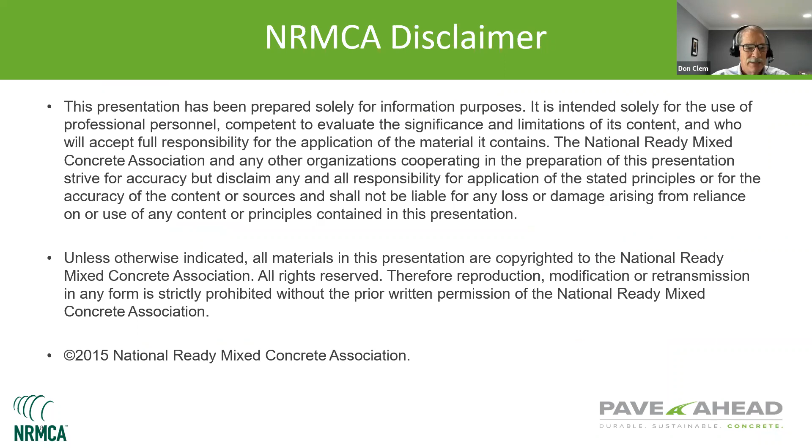And we work under the direction of Brian Killingsworth, who's a very good paving engineer. He has a master's of paving from Texas A&M and is a wealth of information. He's our team leader. This is our disclaimer statement that we put up in every presentation that we provide. Basically, it says we at NRMCA strive to present information as accurately as possible. We intend for you to use the information at your own discretion, and we do disclaim responsibility for how the information is actually applied.

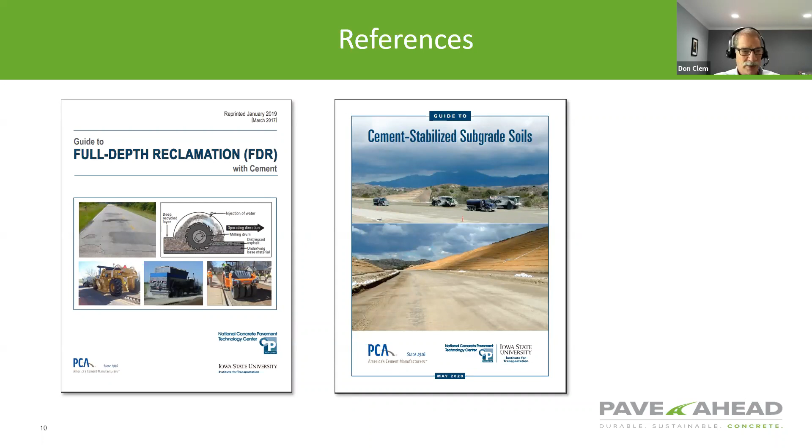Our references include the Guide to Full Depth Reclamation, fondly known as FDR, with cement, and also Cement Stabilized Subgrade Soils. Both of these publications are produced by the National Concrete Pavement Technology Center. They do a very good job producing publications - they're easy to read, very well organized. You can find those online at our paveahead.com site, or on the National Concrete Pavement Technology Center site to download these publications.

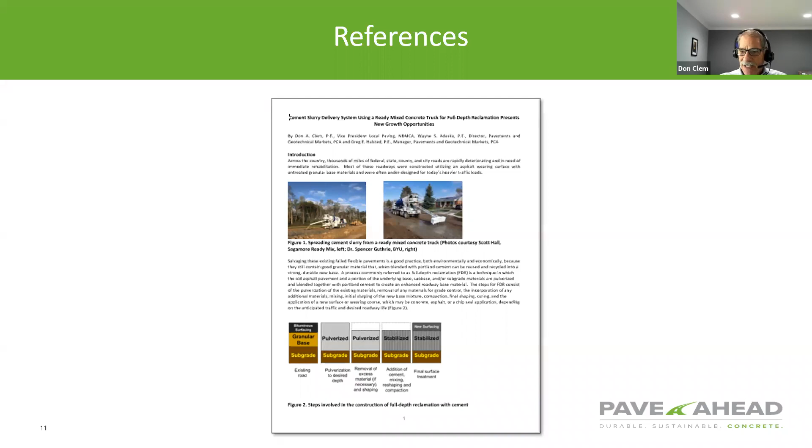We also used as a reference an article we put together last year, written by Wayne Adaska, a former PCA employee, Greg Halsted, a current PCA employee, and myself. We wrote this article last fall for the Illinois Ready Mix Concrete Association. It was published in their newsletter, and I'm sure Theron can get that to anybody who would like that resource. I should mention Greg Halsted with the Portland Cement Association - he's based in Bellingham, Washington, and he is a very good resource for anything regarding geotechnical applications of cement and soils, be it soil cement, full depth recycling, or cellular concrete. He's an expert in all of those areas.

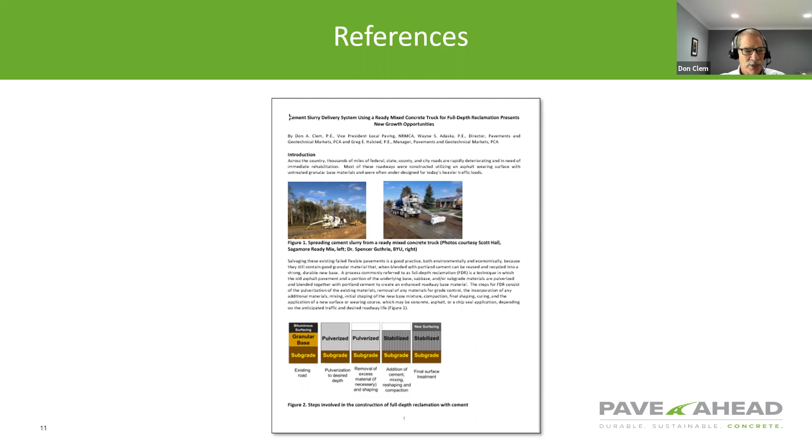So our first topic today is understanding the definitions of soil cement and full depth reclamation. And for that, I'm going to turn control of the webinar over to Jonathan.

Yeah, if I could talk here, I get a little tongue twisted. I want to thank you for the introduction. I do have my camera off - I'm nothing to look at, I can tell you that. I've also got bad lighting and I'm on a laptop, so it's not the best backdrop. Hopefully everybody can hear me good. Again, Jonathan Pease with Rock Solid Stabilization, and also the current president of ARRA.

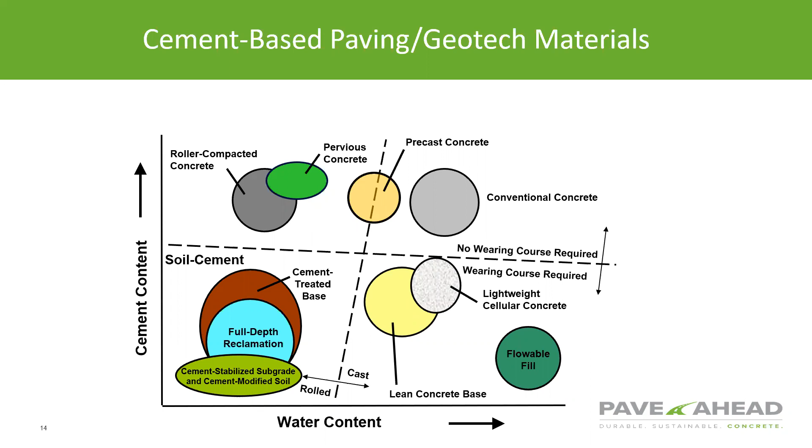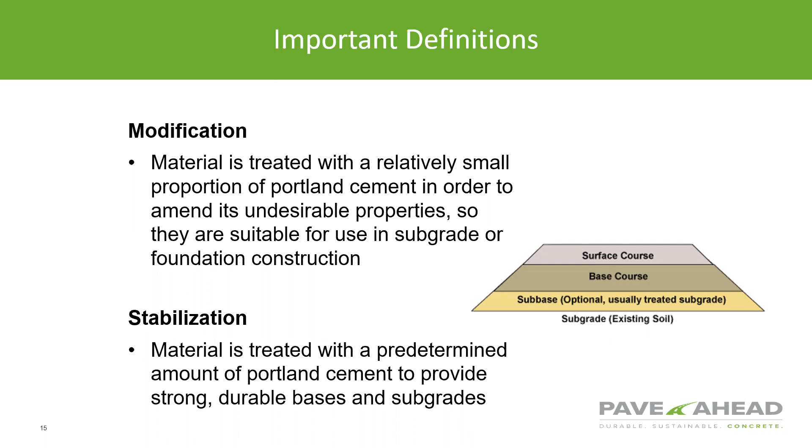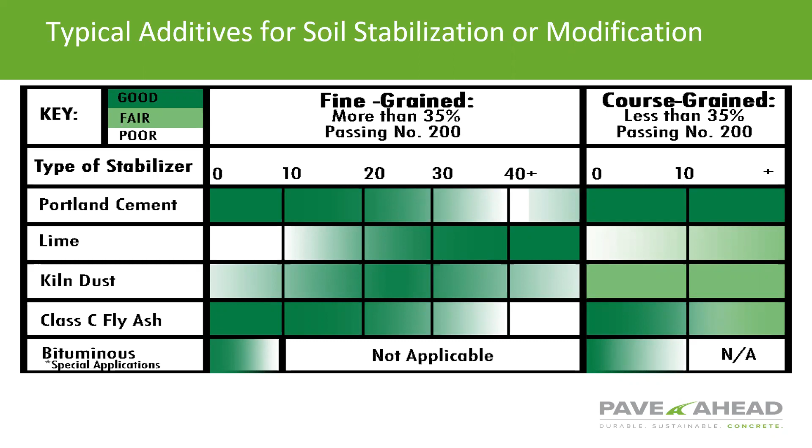It shows you the different soils they work in, fine grained, coarse grained, and where they typically work best. So you've got your Portland cement, and your Class C fly ash, which is becoming harder and harder to get your hands on. Very similar characteristics versus your lime and your kiln dust, and then there are also some bituminous ones you can use in certain soil conditions. Just a nice chart for reference in the future.

So soil cement definitions: soil cement refers to a compacted engineered mix of soil, cement, and water, designed and constructed for various pavement and geotechnical applications and characteristics. The term soil cement is an umbrella term covering four types of cement treated projects, like CMS, cement modified soil, and CSS, cement stabilized subgrade. There's all these different acronyms used throughout. FDR is a big one, CTB is another big one.

If you're treating aggregates, a lot of times your aggregates don't have the best characteristics, so you can treat aggregates. They do a lot of that up in North Dakota, where they've got really sandy, non-angular gravel, and they improve the gravel characteristics with cement to make it a better quality gravel.

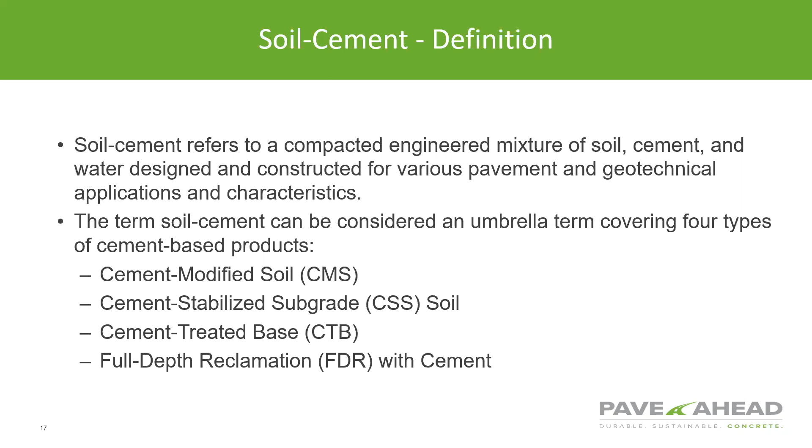Obviously using cement with FDR, and we'll talk about some other additives in that realm later. FDR definition: it's a method of flexible pavement reconstruction, so this is just HMA, not concrete, of the existing asphalt base and/or subgrade. You're removing the existing entire asphalt cross section, usually into the existing aggregate base and/or into the subgrade at times, making a nice homogeneous blend of it all and mixing it together to make your new sub-base material, usually to some design strength or performance requirement. It's removing all the imperfections in that cross section and making a better overall platform to build the actual pavement cross section on top of thereafter.

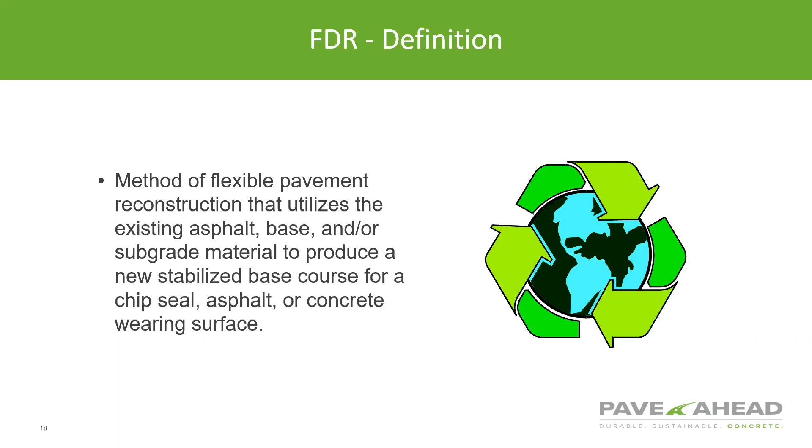There are three main types of FDR stabilization. The first one is mechanical, which a lot of states are doing right now. A lot of this is happening in Michigan, where they just don't have the budget to repave roads, so they're taking old paved roads and turning them back into gravel roads. That's basically mechanical stabilization, where you're just taking that existing asphalt and pulverizing it down to about 1.5 inches minus.

Then there's bituminous stabilization with asphalts, emulsions, or foamed asphalt. And then there's also chemical stabilization, which is usually some type of self-cementing material. The biggest product used for FDR by far is Portland cement. It's readily available everywhere, it's consistent, it has ASTM and different types of specs that everybody has to make it to. It's very consistent and used worldwide.

There are also some other polymers and enzymes. In the event your existing cross section doesn't have the right gradation needed in any of these processes, you can do what the industry generally calls add rock. You could add fines or coarse aggregates to change the matrix of your blend after you actually run it through the reclaimer. So that's the term add rock, but it could be fines too, it doesn't have to be just rock. It's just to get a better matrix overall.

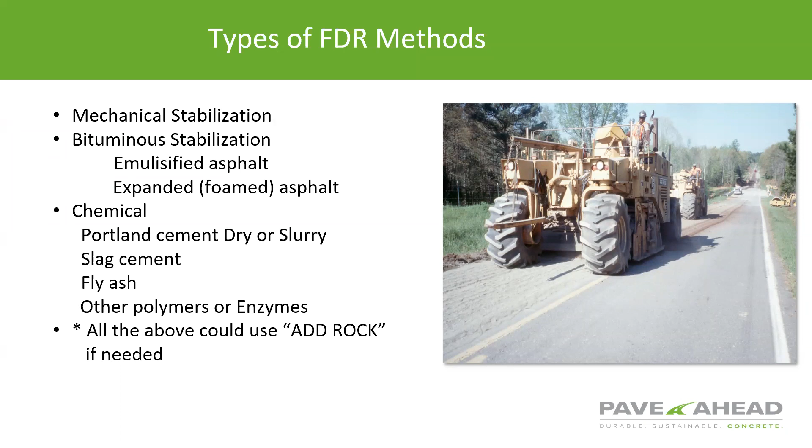So here's the different layers where you can see cement being used. Obviously you've got your untreated subgrade at some point in time, you're not going to go down indefinitely. Then you could have your treated subgrade with cement, you could put cement in your base courses, you can put cement in your FDRs, it could be in your finished surface layers. It could be used throughout the entire cross section of a road, so it's a very versatile product for sure.

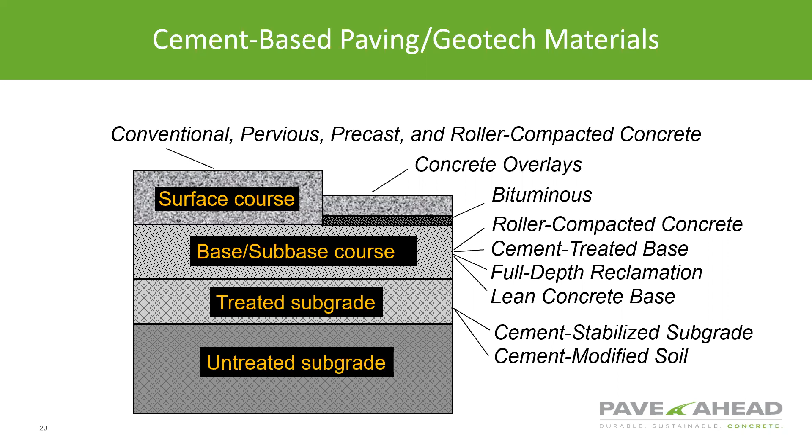So in the soil cement family, I think we kind of covered this already, but we've got cement modified soil again, we've got cement stabilized subgrade, cement treated base, and FDR.

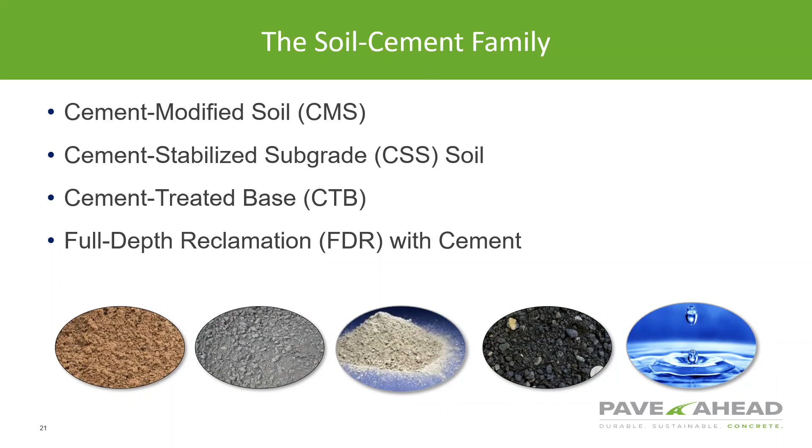So there's the different acronyms there, which are obviously used frequently in the industry, and we're just trying to create common terms so that when we're talking about them, everybody's talking about the same thing. But that's pretty difficult to achieve commonality because even machines have 15 different names for the same machine out there.

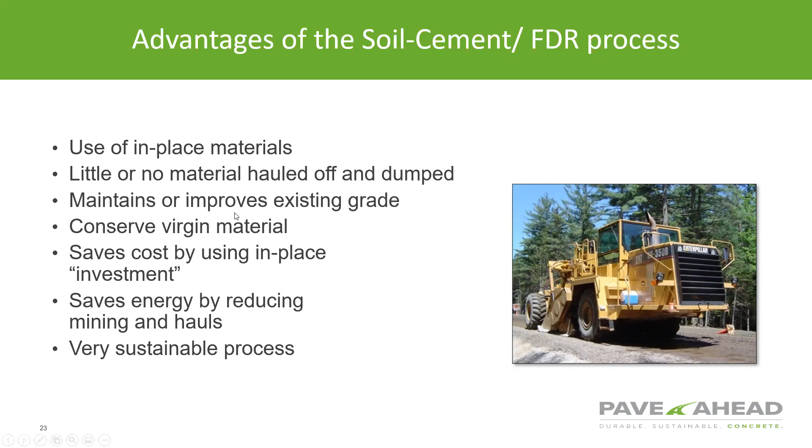And the bottom line is, as Jonathan mentioned, it saves you money by using that in-place material, because you're recycling and reclaiming those in-place materials to create a new solid base for either an asphalt or concrete pavement, or perhaps a chip seal pavement. You're going to save a heck of a lot of money over removal and replacement, so the taxpayers really win with this process.

This is an ARRA slide that Jonathan provided to us, and you can see there are a lot of benefits that FDR has over the overlay process, and quite a few over remove and replace. Probably the biggest one is that lower cost.

But the sustainability aspect is going to become more and more important. As I mentioned earlier, I cover the Northwest — not California, but Oregon and Washington — and I'm watching legislation out there every year that more and more covers construction materials. So sustainability, whether we like it or not, is going to become a bigger and bigger part of material selection on projects in the future.

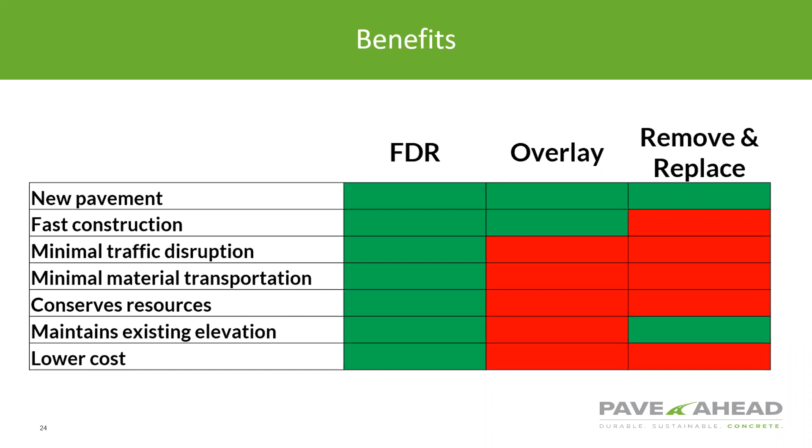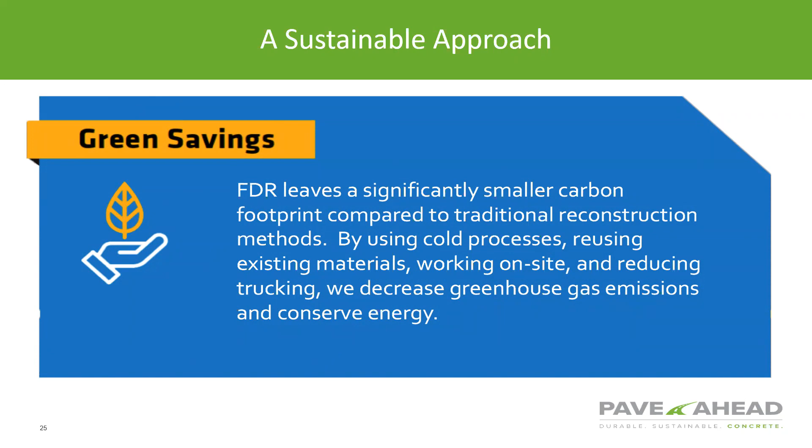And in this case, it actually makes a lot of sense because it saves you money as well. FDR leaves a significantly smaller carbon footprint compared to traditional reconstruction methods, by using these cold processes, reusing the existing materials, working right on site, with generally no hauling off of materials. We decrease the greenhouse gas emissions and conserve energy associated with that project.

This is probably, beside the cost aspect, the biggest benefit I see to the overall FDR process — the performance of these subbases, particularly underneath flexible pavements. As most of you on this call know, with a flexible pavement you have a layered system, and the layers beneath that flexible asphalt really have a lot to do with the load carrying capacity of that roadway.

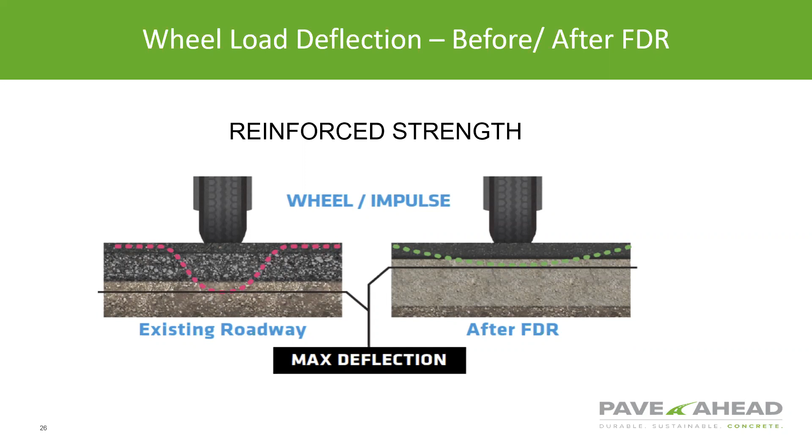So there's a lot of advantages for using Portland cement as a stabilizer. Jonathan mentioned that there are quite a few different stabilizers out there.

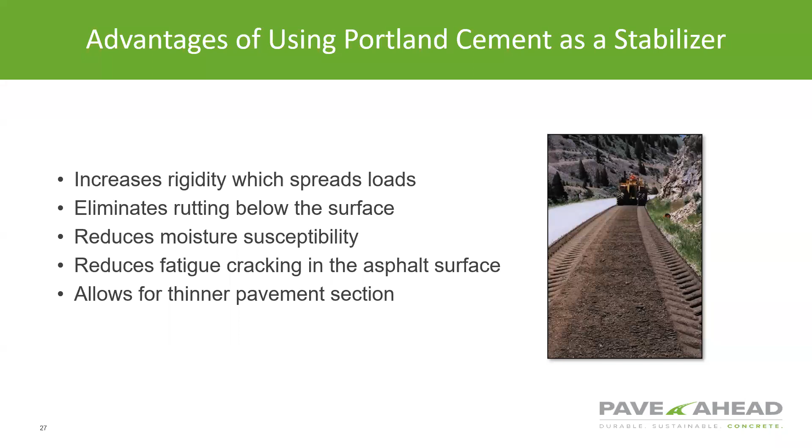Portland cement is known in the industry as the universal stabilizer because it works with so many different soil classifications. The benefits include spreading the load, which eliminates rutting below the surface. It reduces moisture susceptibility, reduces fatigue cracking in the asphalt surface, and could allow for a thinner pavement section. What I recommend to engineers is they don't reduce the asphalt pavement section, but rather leave it as is and enjoy a longer pavement life. That will certainly increase your life cycle cost benefit, or reduce the life cycle cost on a project.

Within the cement family, we've got a choice of using either a dry spreading method or a slurry method. There are some advantages to the cement slurry application method, and probably the biggest is that it reduces the dusting associated with the dry spreading method. This would come into play in an urban setting, or perhaps next to a hospital or other facility where you really don't want any dusting. That would be an ideal place to use a slurry method.

Also in, let's say, a cul-de-sac or very tight quarters, the ready mix truck can bring that slurry into those very tight places with ease. There is a variety of equipment available for delivering slurry using a ready mix truck, and there's also tanker trucks that can deliver slurries. Laboratory testing has demonstrated that there really isn't much difference at all between the slurry process and the dry spreading process as far as unconfined compressive strength. So as far as performance between the slurry method and the dry method, there's really no measurable difference between the two.

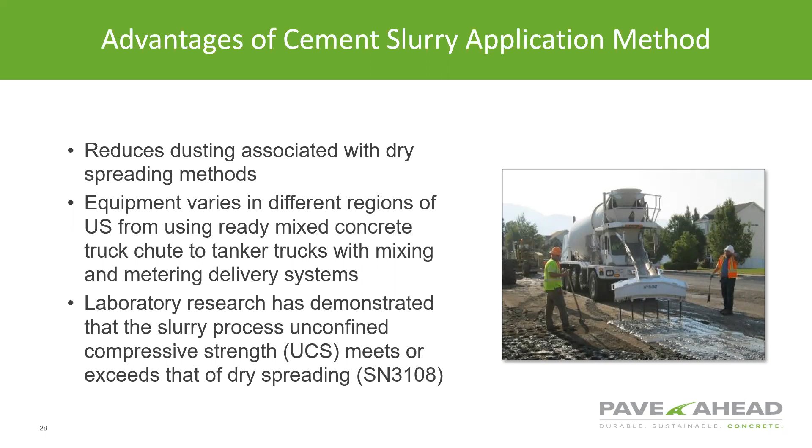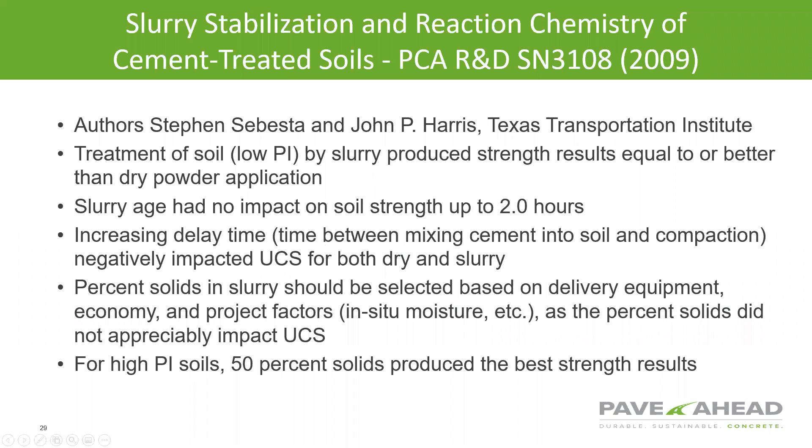Here you can see results of a study, an older study done in 2009 by the Texas Transportation Institute. Some of the findings: as I mentioned, there's no difference in the strength results. Slurry age had no impact on soil strength up to a period of two hours. Increasing the delay time did negatively impact the unconfined compressive strength for both dry and slurry. The percentage of solids in the slurry should be selected based on the delivery equipment. For high PI soils, 50% solids produced the best strength results in this particular study.

Illinois Department of Transportation recently adopted a special provision. We worked with Illinois DOT, along with Portland Cement Association and the Illinois Ready Mix Concrete Association, on preparing this specification. It was very well vetted, a consensus specification. I'd like to recognize Theron Tobolski with IRMCA and James Krstulovich with Illinois DOT for their work. They put in a lot of time, and it's a very good document that resulted from it.

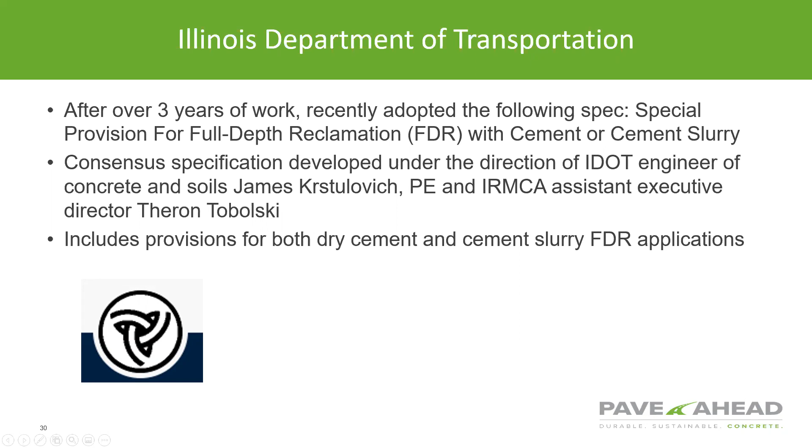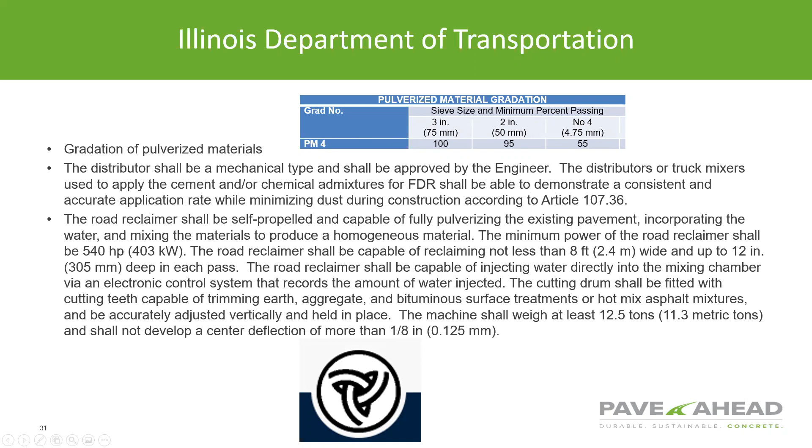I'm not going to go into detail, but what you can find here is a gradation for the pulverized material, specification on the reclaimer itself, process specification on the slurry process with some limits—a minimum 60% dry solids content by weight is in the specification—and a time frame of 90 minutes after first contact for the material to be applied to the surface. It's a very comprehensive specification if you'd like to go online and look at that.

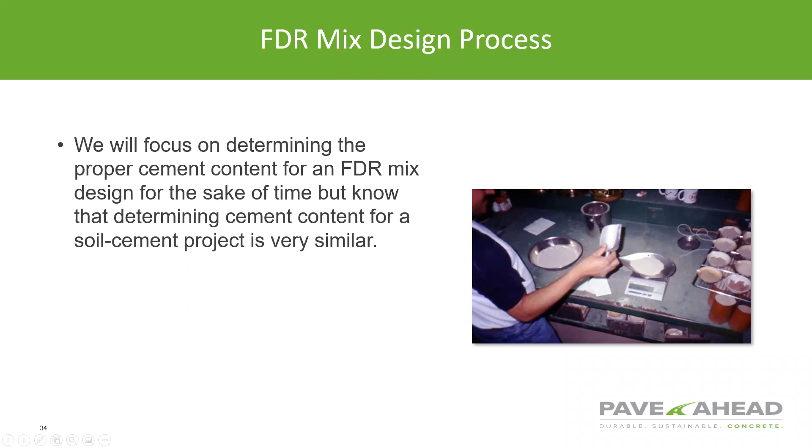Next topic I'd like to cover is how to determine the appropriate cement content. We're going to focus on FDR for the sake of time, but the same provisions apply for soil cement and the other family of cement products you saw earlier. The basic process is you conduct a field evaluation to determine the materials that make up the existing pavement. We want to take those materials from the field, bring them back to the lab, and combine them in the same proportion you find them in the field.

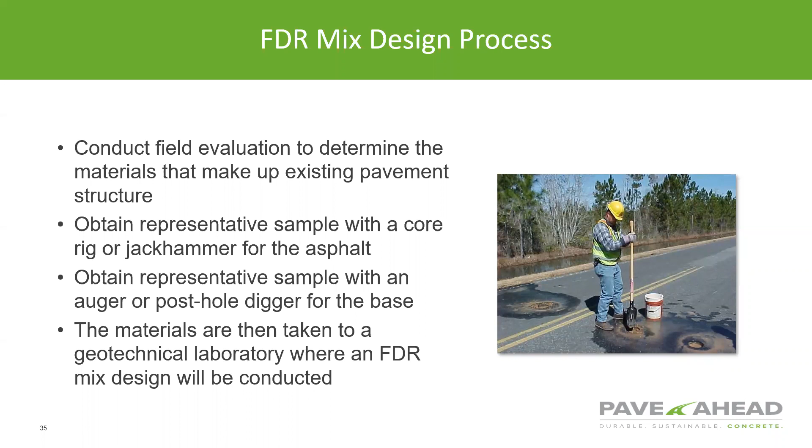You can obtain a representative sample with a core rig or jackhammer for the asphalt, and an auger or post hole digger for the base below. Materials are taken back to the lab and recombined. It's crucial to obtain a good sample of all those materials and combine them in the same proportion found in the field. You want to take enough cores to ensure a representative sample for the whole project along its length. In the lab, they'll run sieve analysis, compaction requirements, maximum dry density, and optimum moisture content. Finally, they'll analyze all of that, and the lab will determine the target cement content that provides the specified unconfined compressive strength for the project.

Typically, we will see those unconfined compressive strengths in the range of 300 to 400 PSI. One point I want to make is that more cement is not necessarily better, so keep that in mind. We're looking for a balanced design.

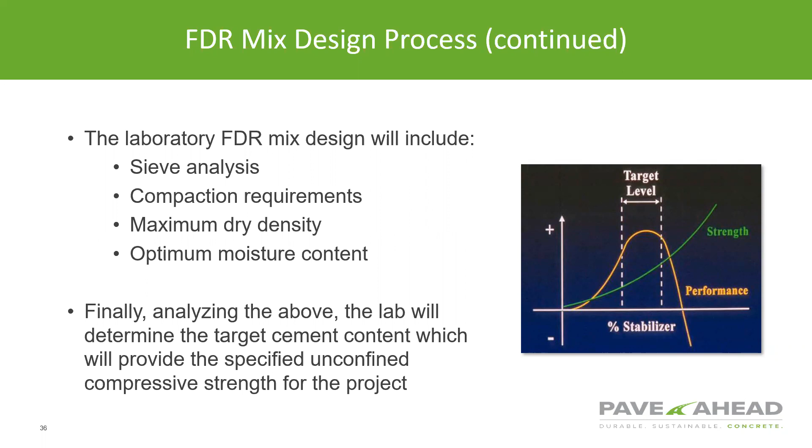So we really want a balanced design. We want to be in this area where we have the best performance of our subgrade material and surface course - I guess I would say the best performance of the system itself. At the end of the day, that's what is most important.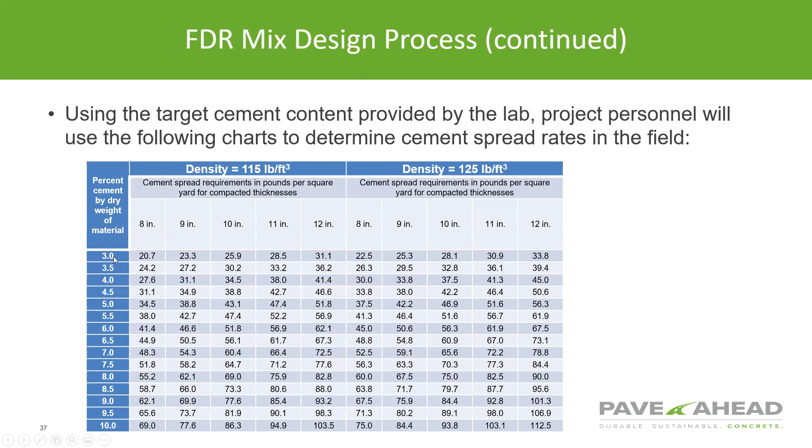When they do reclamation, generally speaking the highway department on state highways doesn't take any of the subgrade materials below the asphalt and the base. So they stay in the granular materials and just use a flat 2% to stabilize those materials, and they found that works very well. But in the normal situation, you're generally going into the subgrade material, so you're probably going to be in this range here. We'll look at this in more detail a little bit later.

I'd like to mention that Jonathan's company has put together a very nice tool which allows you to skip that chart altogether. It's actually an app where you put in the dry density, depth, and the application rate.

What you can end up with is the spread rate, the coverage area, and for a given width - let's say 16 foot in this particular instance - we know we want to go 134 feet to cover that area with the cement that we're spreading. We'll look at those calculations in more detail. But to download this, just Google rock solid stabilization and reclamation, and this particular tool will come up.

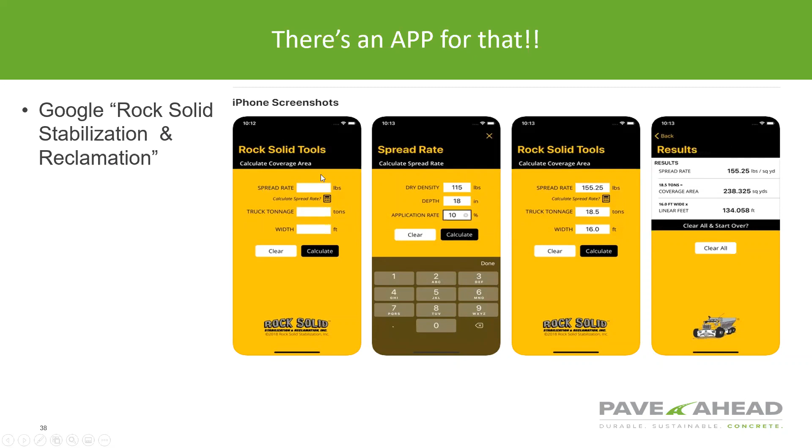I checked it out, it's really put together well. And with that, I'm going to turn control back over to Jonathan to talk about the soil cement FDR construction process. Jonathan, all yours. Thank you.

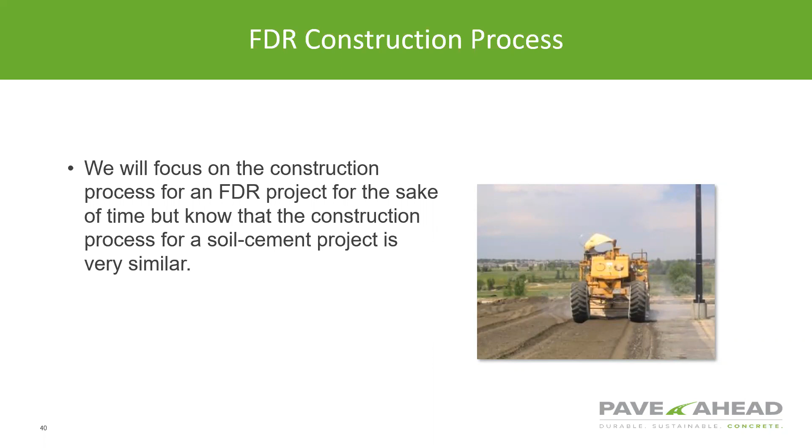The FDR process: you've got your existing road to the left there with the existing asphalt, gravel, subgrade. Then you typically go through and do a pre-pulverization, and you blend in that—so if you're going to do a 12-inch FDR, you want to do a 12-inch pre-pulverization typically.

The only time we haven't done that was a job for FHWA where it was 7 inches. We did a 7-inch mix design and the cement content came back extremely high. So when you start seeing materials being used at higher rates than they should be, there's probably something goofy going on, or it's not the best material to use—which I'll bounce back to in a second.

When we were talking about the different things out there with cement, limes, and so on, we've done quite a few projects now where we had to use lime first to chemically modify the soil, but then had to use cement to actually stabilize the soil and give it long-term strength. So blends are a thing out there.

They work fantastic. We're actually challenging people in Shreveport, Louisiana with this—they're just used to the way they do things down there with lime. We're introducing lime-cement blends and they're kind of like, what are you guys doing? And we're proving it in the field, proving it with mix designs, and now the entire project is going that way. So there are a lot of things that are regional that people just do because that's what they've always done. But there are better ways to do that stuff.

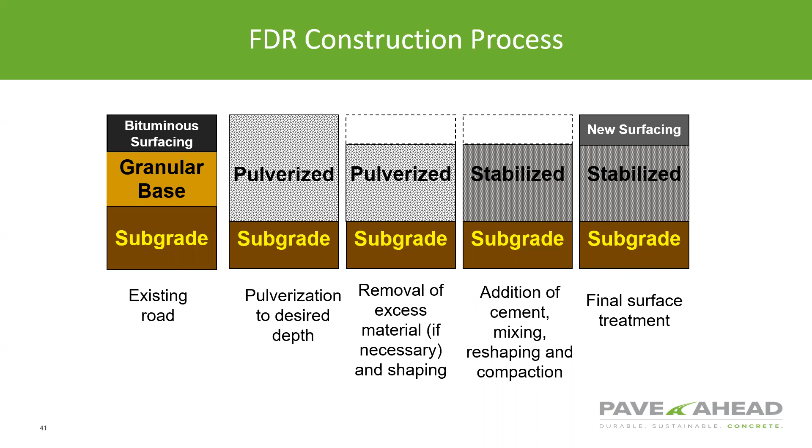Just by doing a pre-pulverization at a different depth than the actual process depth, we had fantastic results—and that was on an FHWA project. Then you stabilize with cement, reshape, compact, get it all graded and done to the right cross-section profile, then put your new surface on there. That's just a high-level overview of what happens.

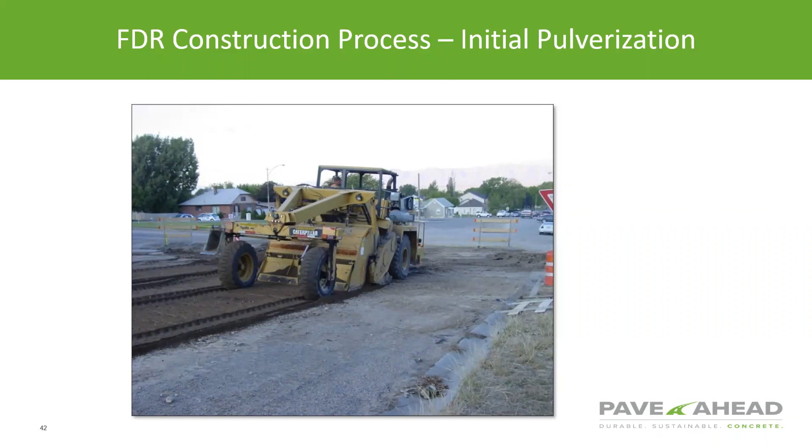Here's some pictures—you've got your initial pulverization. We do have some older pictures in here because we want you to see that this stuff isn't new; it's been around and done for years. That's an old reclaimer right there—you'd be hard pressed to see one like that working anymore today.

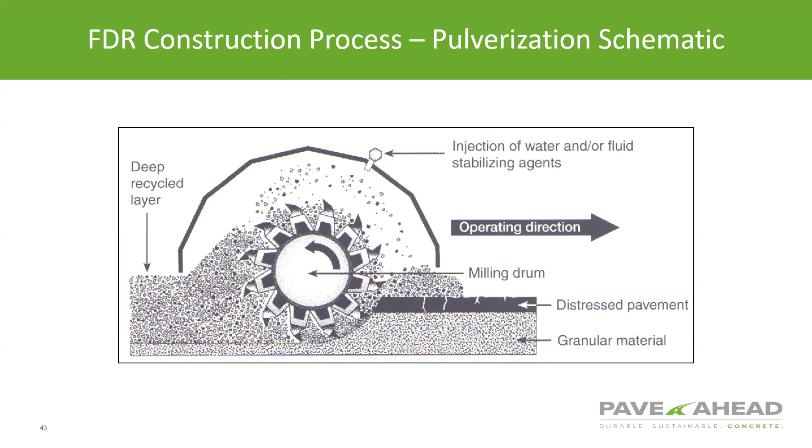So that's what you would be seeing if you're looking inside that drum, but it would be pretty harmful to do that while it's moving, so we have to do it with pictures.

After you pre-pulverize, you want to shape it to the grades of your final surface that you're going for, so you have a uniform cut on the mixing part. Before you spread the material for the stabilizer, you want to make sure your cross section is what you want it to look like in the end, so you're not cutting and filling your stabilized material. So pre-shaping and pre-compacting is very important to do.

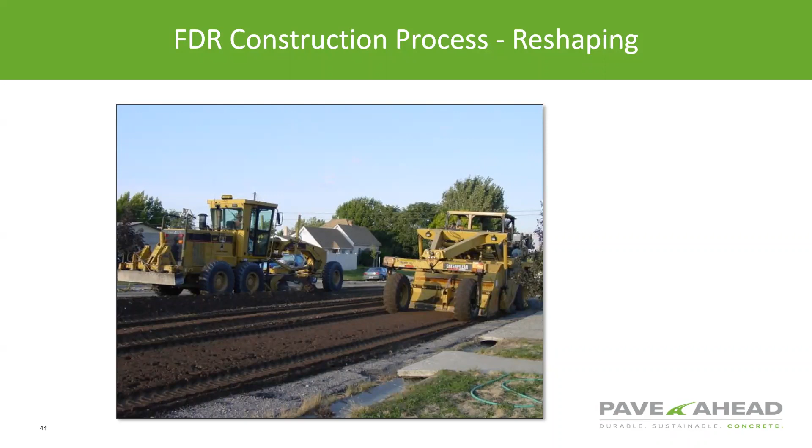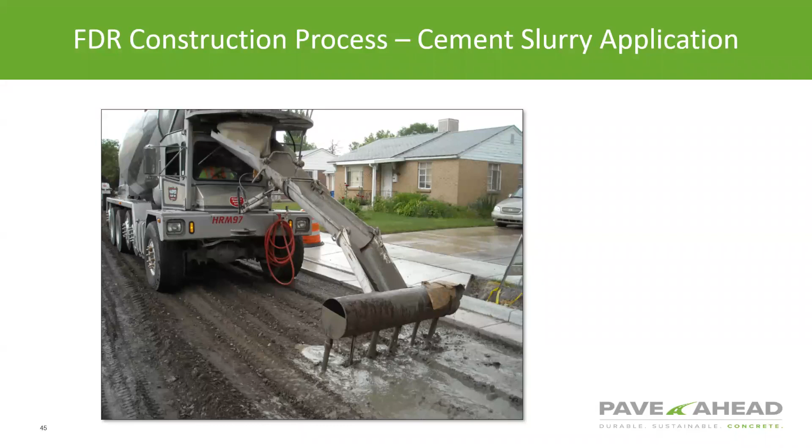Then you want to apply your slurry. There's obviously various methods, and we're going to talk about that a little bit later on, but this is just one of the methods of spreading slurry.

Every load gets laid out, hence that's why we use that app. So if we're doing a road that's 22 feet wide and a load comes in at 26.98 ton, and we know we're supposed to put down 52 pounds a square yard, it can tell our operator exactly how far to go with that load. We lay it out and make sure that load fits into that box, but there's aspects of humidity, temperature, things like that affect how the materials will flow out of the box, out of the machine onto the ground.

So it's not like you can just make one simple pass and it's perfect every time. You have to trust some old school technologies, still put it where it belongs, and visually look at it.

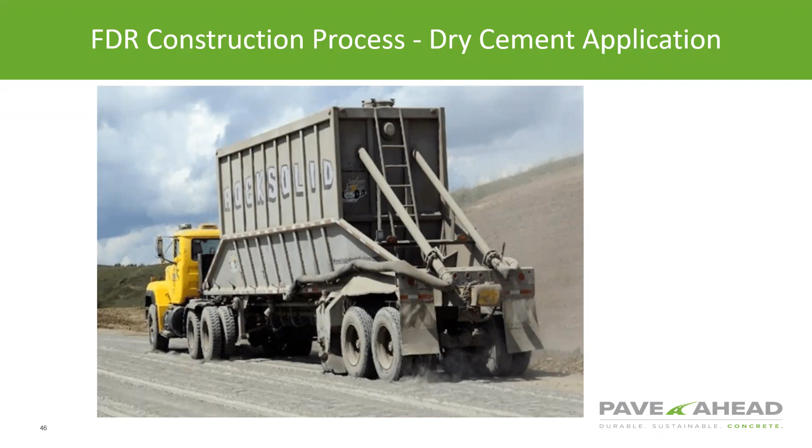There's a bunch of manufacturers of this equipment. A lot of people have some proprietary stuff that they do, but there are parts of the country, mostly down south, where you will find people bringing a pneumatic tanker out and having somebody walk alongside the truck and get underneath it almost, opening and closing valves and literally blowing the material on the ground, with zero control over what and how much goes on the ground. If that happens, or if you don't have specs that don't allow that, you should have something that does not allow that, because it's such crude methods that it shouldn't even be allowed anywhere in the world, in my opinion. So this is just an example of a dry spreader.

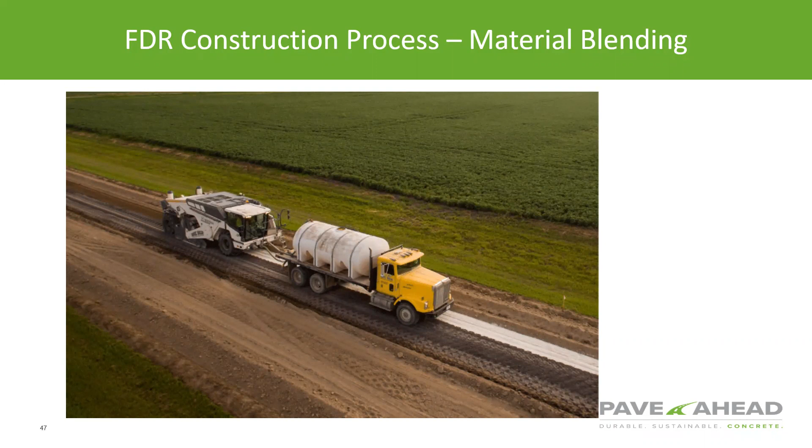Then you've got the blending of the materials. Once your stabilizer's on the ground, whether it's in a slurry or a powder form, you've got to blend it with the reclaimer. Typically you need to be adding moisture, not always, but if you need to add moisture, you're going to usually be pushing a water truck in front of the reclaimer. That way you get exactly the moisture content you want, because it is a water cement ratio. It is a recipe, and you've got to follow the recipe in the field. That's exactly what you can do with the right equipment.

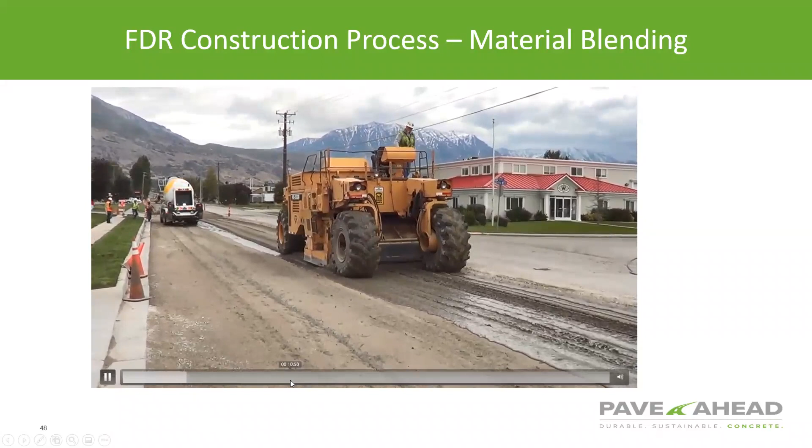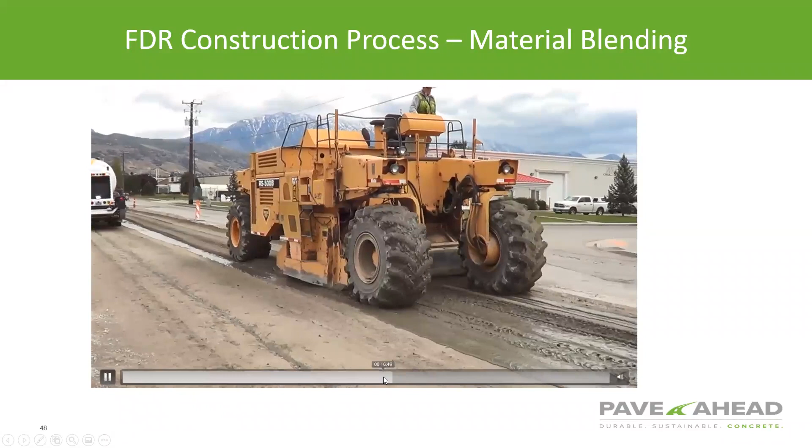Here's a little video on some blending of slurry. You don't see a water truck here, but if there's enough existing moisture in the ground, along with the additional moisture from the slurry, you might not need to add water. As you can see, in this particular case, it likely was not necessary. It's a pretty smooth operation. You could see, even right behind the reclaimer, if one of those cars driving by had to get into that driveway right next door, they could cross pretty much right over it.

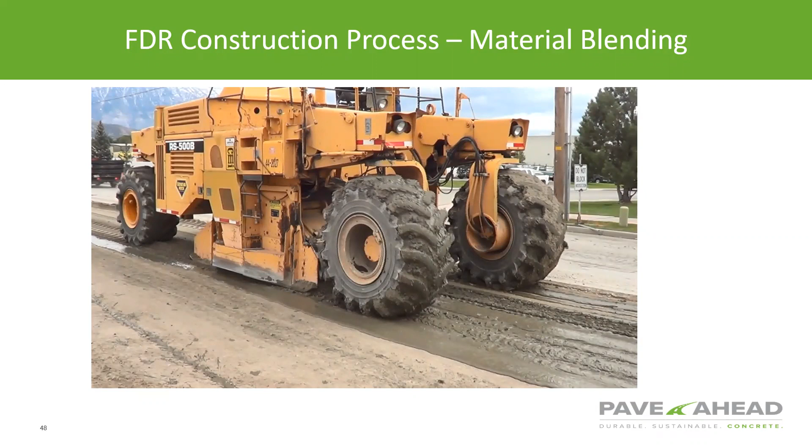And if not right then, they could do it after the first one or two passes with the compactor. So your disruption to the public and getting access in and out of driveways or parking lots, adjacent roads, is pretty minimal with FDR. If that was a full depth removal and replace, and you got an 18-inch drop off, I don't care if you got a Humvee, you're not driving through there until somebody puts in some temp aggregate to drive through, or ramps it and things of that nature.

So, very, very friendly for the environment of the public, and very conducive to that. Here's just another shot of some slurry being mixed in. This is actually up in Montana, getting mixed in with some slurry on the ground.

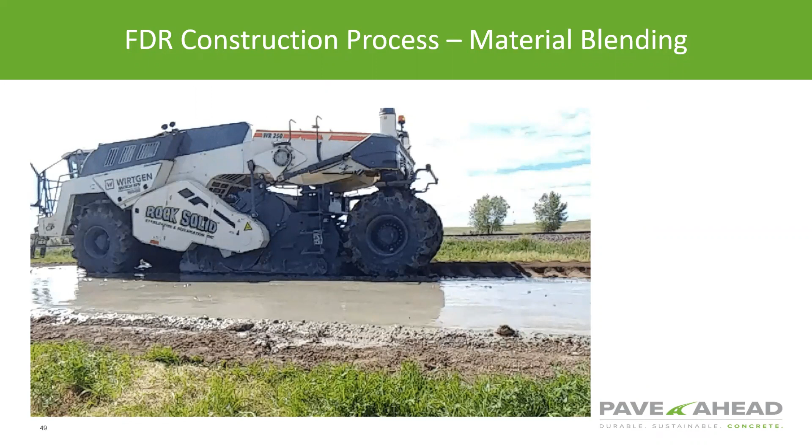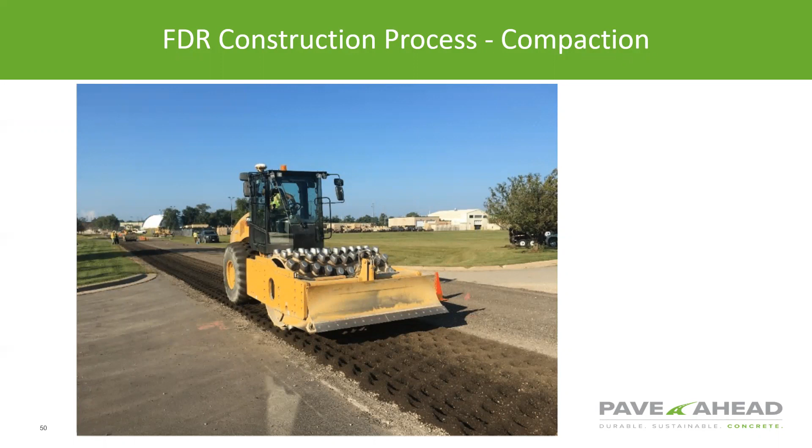And then you have your grading. Obviously, you want everything graded back to its proposed elevations, cross slopes, and the grading process.

So from the time the powder or material gets blended into the ground, if you're working with a slurry, you can't let it sit on the ground for 3 hours. A powder, you can let it sit for 3 hours if it's not soaking up moisture. But from once you get the mixing started and done, to the final grading and rolling, in my opinion it should be closer to that 2 hour mark. Some specs are like 4 hours, but the tighter you can keep that timeframe, the better. If you can get it done in a half hour, you're going to have a better product than if it takes an hour and a half. And an hour and a half should be better than if you get it done in 3 hours.

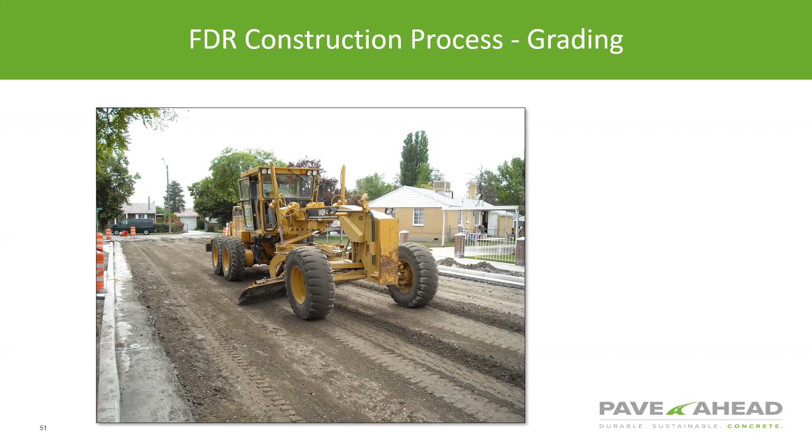So the tighter you can keep that time frame, the better the product is going to be in the end. Not getting strung out too far, keeping everything together, with a competent team that can handle it, will always give the best job possible.

And then you got some type of finish rolling on the back end. It could be steel drum, could be pneumatic rollers like this, sometimes a combination of both. It really just depends on local markets, availability, things of that nature, but they all work in their own ways and they all have their pros and cons.

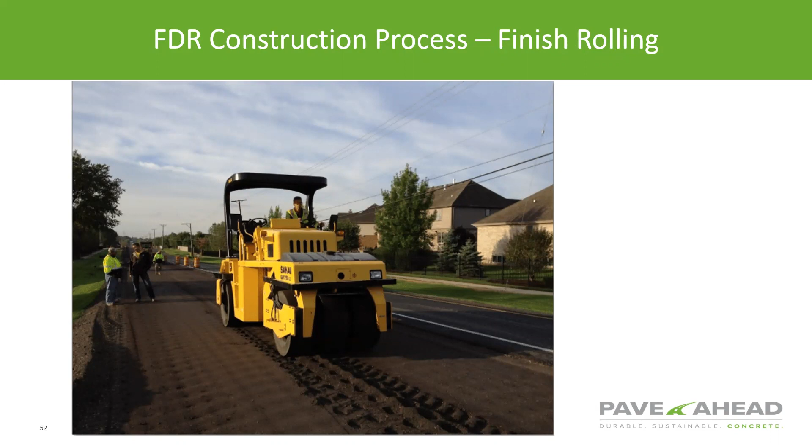And then some type of curing, typically it could be wet cured with water, or you could emulsify cure with emulsion. It's about trapping that moisture in, kind of like your bridge deck. You pour concrete on a bridge deck - what's the best way to cure concrete? Flood it underwater for like a month. So if you can keep it damp, you're going to get a better cure out of it.

And it's this exact same thing with soils or FDR. If you can keep it damp, like - we've had some projects where we treated it and had some issues with frost coming in, so we put the gravel back on top. We actually wet it down when the gravel was sitting right there, just laterally moved it over, kept people off of it with loads, and let that gravel become the actual membrane that trapped the moisture in, which allowed it to help slow cure too. So it just depends on the cost you want to spend.

There are regions where it's very common to microcrack. Microcracking happens usually at least 48 to 72 hours, if not longer, after the curing process has happened. It's basically slightly rubblizing that FDR cross section to create little microcracks in there, and those won't reflect through, versus the other stuff, which can still crack. That's what I wanted to bring up a story about.

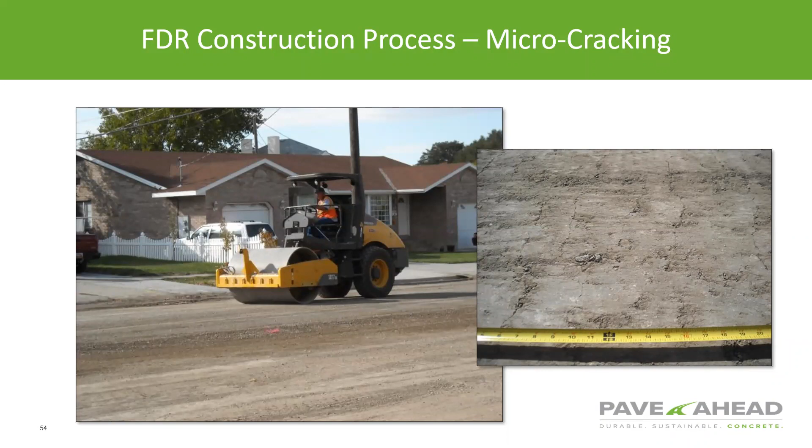So in a case like that, if it was microcracked, it might not have had as bad an effect with the reflective cracking coming through. So I wanted to share that story, I thought it'd be relevant for the audience.

So I think this one's still me, right Don? Yep. So like here, huh? Yeah, you got this slide, and then I take over after you.

I've seen cape seals, chip seals, microsurfacing. I've even seen fog seals temporarily go on as an overlay. That was another thing I wanted to bring up on the surface things.

There's a comment Don made about how you can thin up your surface. I agree, don't get the life out of the road, but you can also stage that budget. If you've got the budget, maybe don't do the surface layer this year, maybe wait 5 years and do it then because you've got plenty of strength below, and maybe do 2 layers of surface instead of just one. So if you're going to get say 5 inches of HMA, maybe do 3 inches this year, then 5 or 7 years later when you start to see a little distress in that asphalt, do another overlay with that same budget and stretch it out longer because you have that strength in the FDR down below.

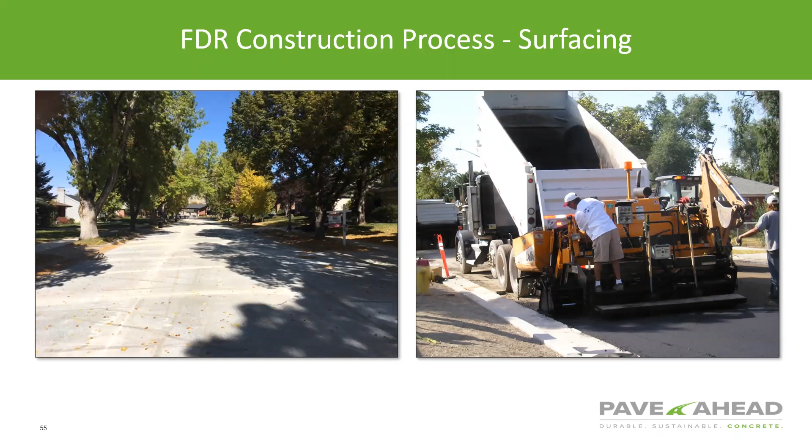So I think I overdid my talk here for you, Don.

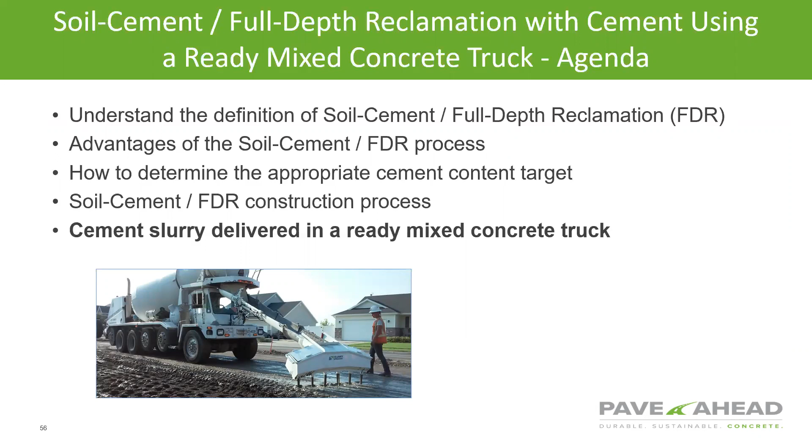Thanks, Jonathan. We'll move into the last segment, which is the cement slurry delivered in a ready mix truck. Some general comments about the slurries: of course they contain cement, water, and sometimes chemical admixtures such as a hydration stabilizer that extends the set time. Sometimes water reducers are used.

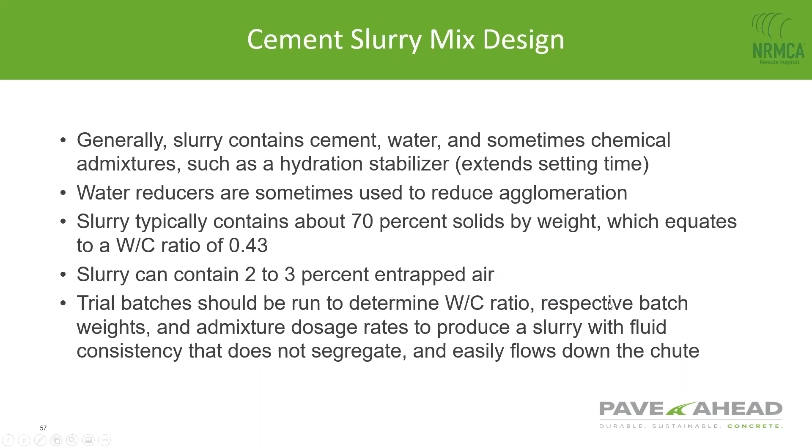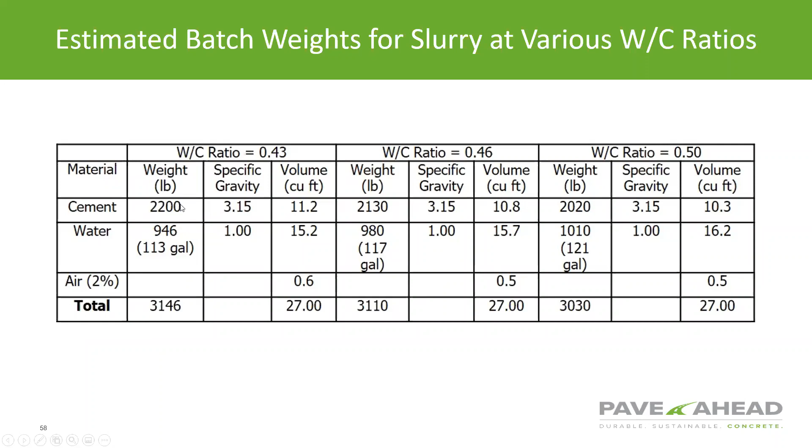Typically, slurries contain about 70% solids. Remember that the Illinois DOT spec requires 50. So the 70 equates to a water-cement ratio of about 0.43. Trial batches can be run to determine the best water-cement ratio with respect to the materials a given producer has. We put together these charts really for a ready mix producer to provide a starting point, and this would probably be your preferred mix design, everything else being equal, so that you can get the most cement material out to the job site in a ready mix truck.

As far as the slurries, once you get out on site, the application rate is based on the weight of the cement in the slurry, and the water is just in there to facilitate discharging. Sometimes sand and pea gravel may be added to facilitate mixing and placing, the flowability. So really, for a given set of materials, a producer should be able to develop one slurry mix design that works best for their materials.

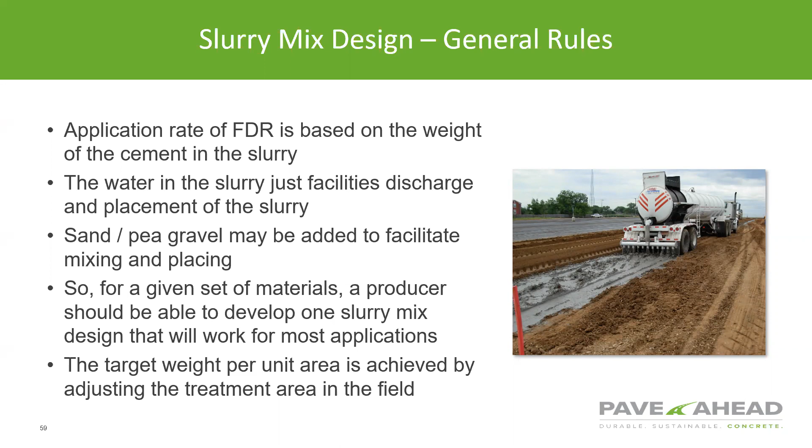What varies is that one slurry design will give you so much cubic feet or pounds of cement per cubic yard. Based on that, you just change the area it covers out in the field in order to work with different cement contents. We'll go through an example.

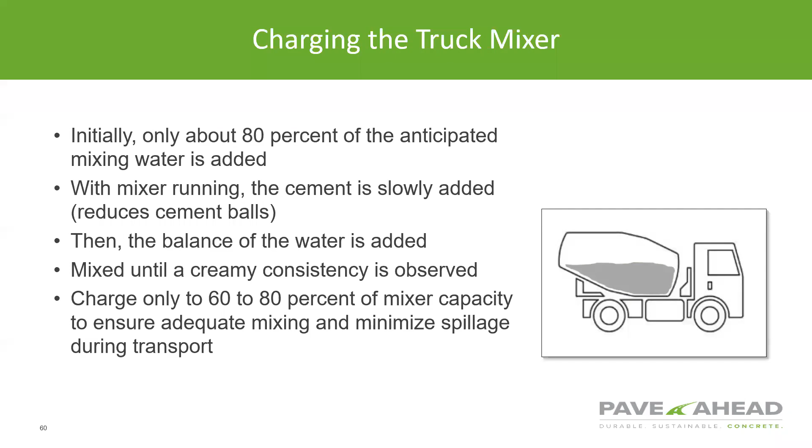As far as charging the mixer, initially about 80% of the water is added. With the mixer running, the cement is added slowly, then the balance of the water. Generally, you charge only 60 to 80% of the mixer capacity to ensure adequate mixing and minimize spillage during transport. So you can't utilize the capacities that you would with normal concrete.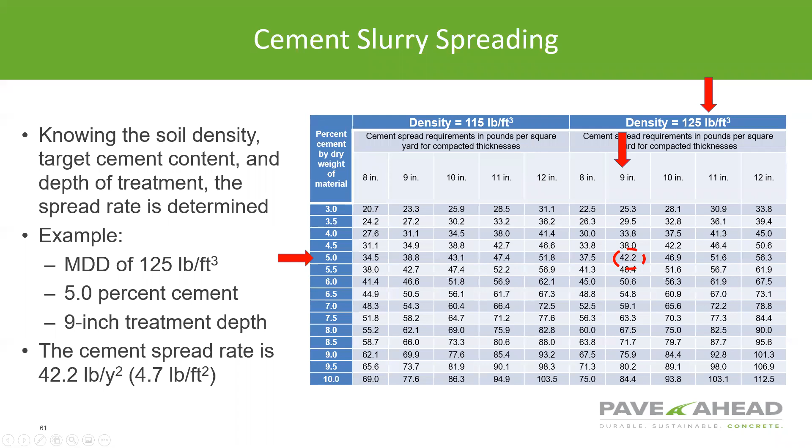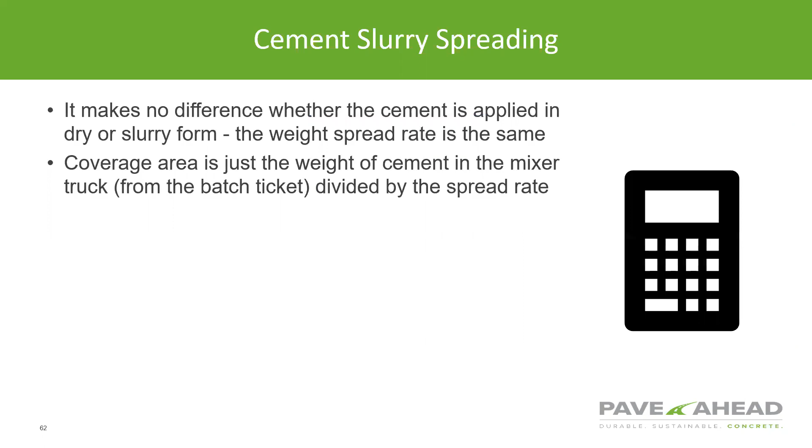It really makes no difference whether that cement is dry or in slurry form; what we're concerned about is the weight of the cement. So for an example, let's say we use that mix design that provides 2,200 pounds per cubic yard, and we've got 8 cubic yards of material. We multiply 2,200 times 8 cubic yards, divide by that spread rate, and that gives us 3,745 square feet. We divide that by, say, an 8-foot wide path, and that tells us we need 468 linear feet. So the driver of that truck would discharge that entire load at 8 feet wide, 468 feet long.

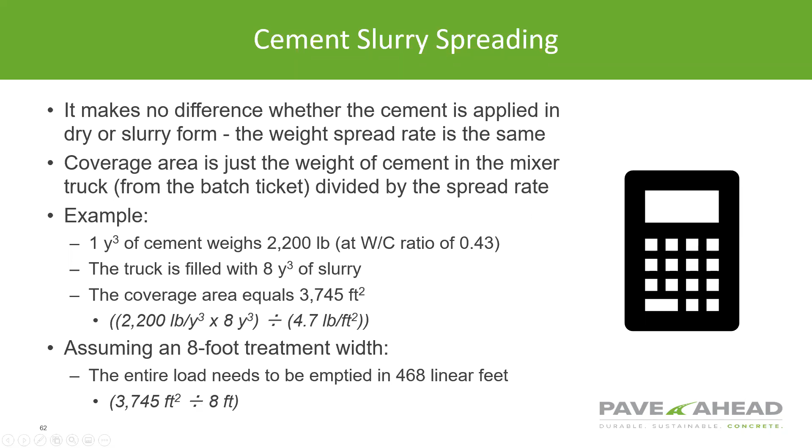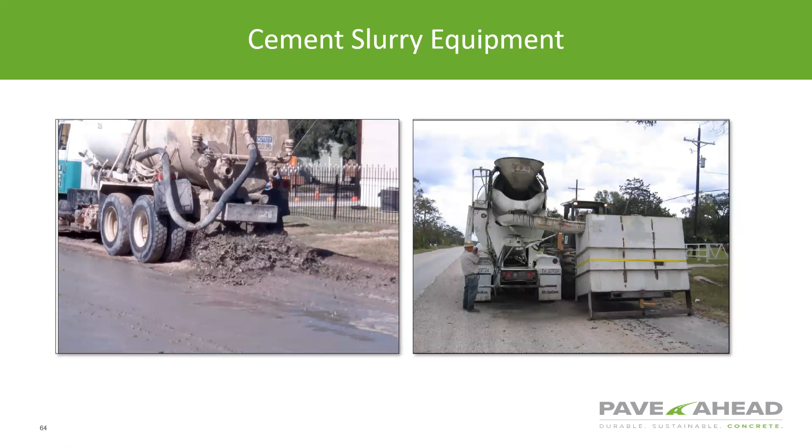We'll just look at some of the equipment that's available out here. You've got a lot of different types of equipment. Here's a modified water tanker that someone put together, and this is a box spreader of some type. So necessity is really the mother of invention in these situations.

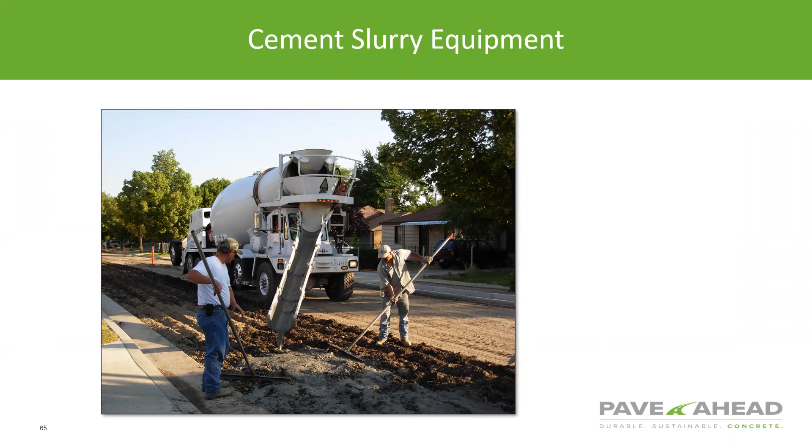A lot of times just a ready mix chute is used and moved back and forth, and that seems to work fine. You get a lot of mixing with that reclaimer when it comes in and mixes the material.

Here you see a spreader that's used in Utah quite a bit. This was invented, or rather fabricated, by a gentleman named John Coyle. He's a city engineer with Salt Lake City, and he developed this in about 2007, and he allowed other cities to use it in Utah.

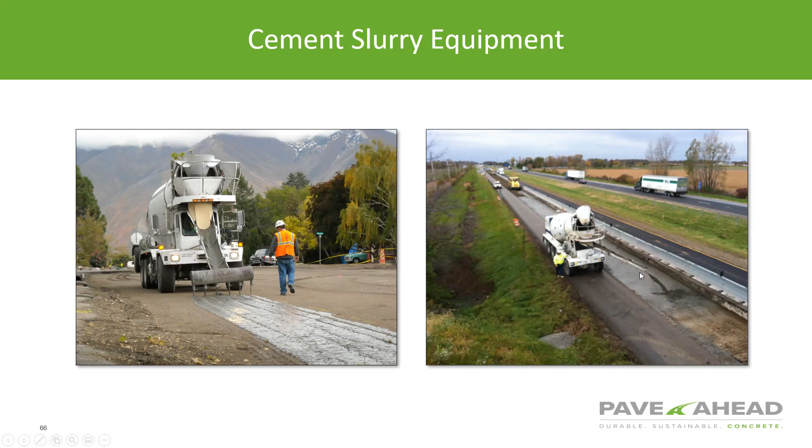Here you can see a large project, I think this is on I-70 in Indiana, and they're just using the chute itself. I'll show you just a short clip.

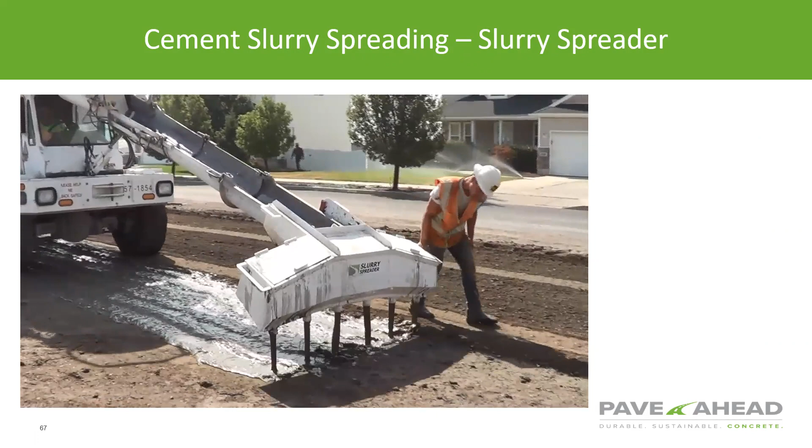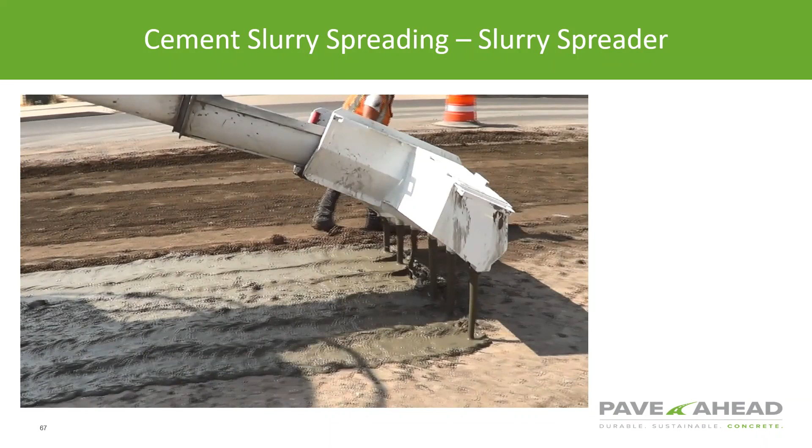That's a slurry spreader, which is a patented product that a gentleman named Spencer Guthrie has a patent on, and he's building that in Utah. It's really just an improvement over what John Coyle had originally come up with.

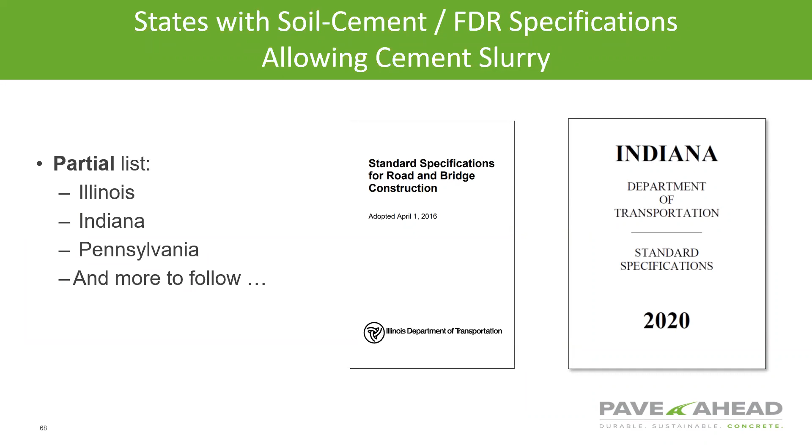Quite a few DOTs do have specifications that allow specifically for slurry, Illinois being the latest one to add that.

Just some sample projects, and I won't go over those in detail, but you can see Indiana is using the slurry process on interstate projects. I suspect that's in an urban area where they're really concerned about dusting, but they've had very good luck. The Kennedy Connector is also a fairly large connector project in the Cincinnati area.

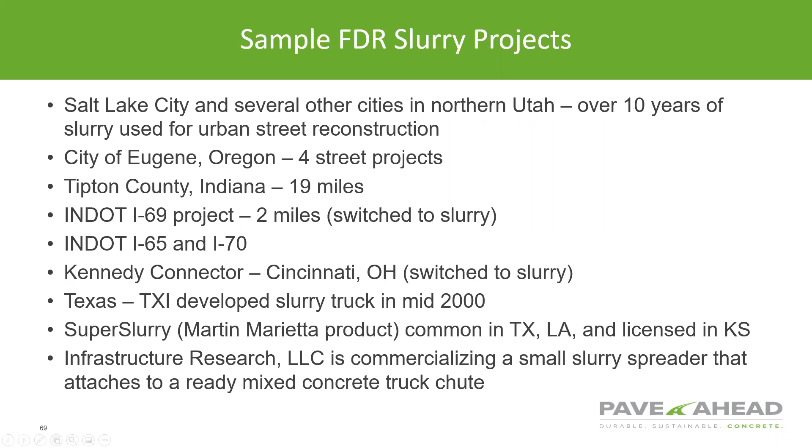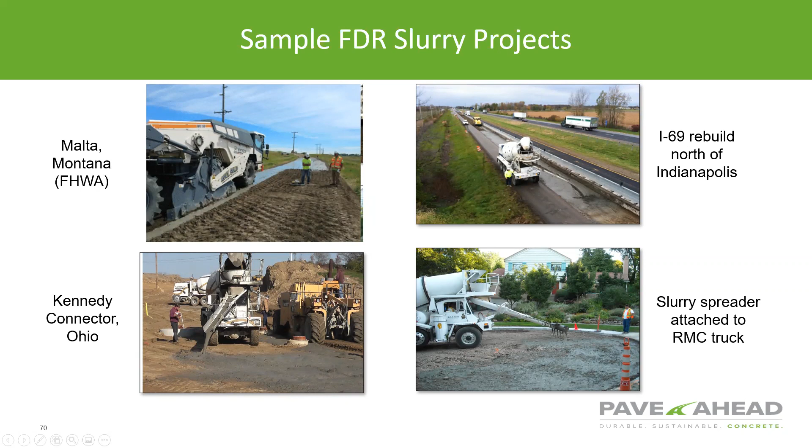You can see I-69 north of Indianapolis using the slurry process. I think this was one in Utah, the Kennedy Connector in Ohio, and this is a project that Rock Solid did up in Montana. So it's being used in many parts of the country.

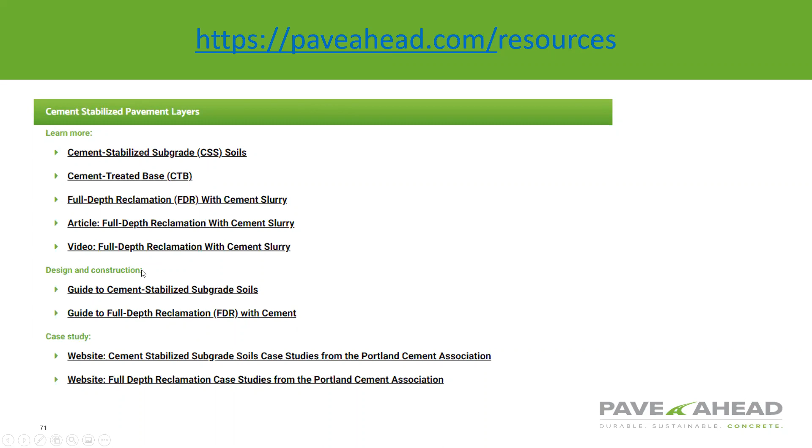I'll conclude by recommending that if you go to paveahead.com/resources, you can get quite a bit of information on slurries. We have case studies, design and construction publications, and some videos as well if you want to learn more.

Here you see quite a few resources, and I would recommend that you reach out to Theron initially, and he can put you in touch with the right resource. He has relationships with all of these various groups and does a great job of getting us involved when the timing is right.